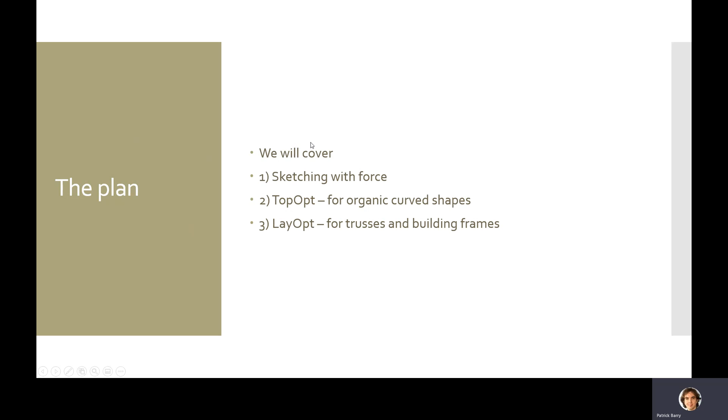What do I mean by sketching with force? Sketching, so 2D, not 3D. Take 30 seconds to make the example, repeat it 5 times, test lots of ideas. The idea is that if something is carrying more force, it gets thicker, which is the same as trees, and the results tend to be quite organic and quite nice looking.

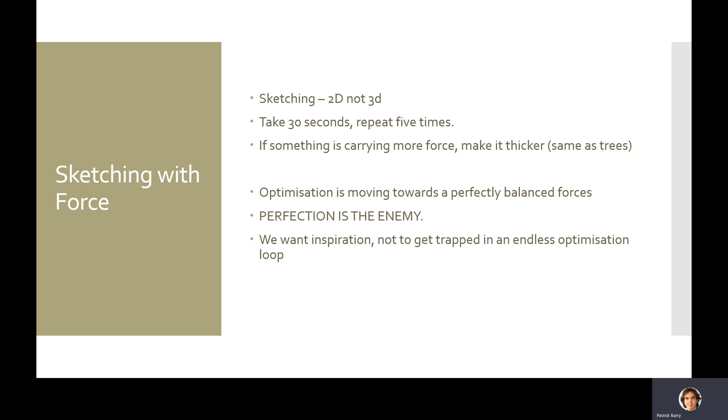Optimization is moving towards perfectly balanced forces, but that's the enemy. We don't want to do that. We don't want to get trapped in this endless loop of moving things 1 millimeter to see if it gives us that 1% improvement. We're looking for inspiration here.

So we'll start with an example. The Qatar National Convention Centre, which has this lovely, sinuous, organic form at the front of it. Taking one half of that front, we're just going to simplify it down to a 2D problem. So we're going to say that there's weight coming in from the roof at those 5 points. We're going to put supports at the bottom,

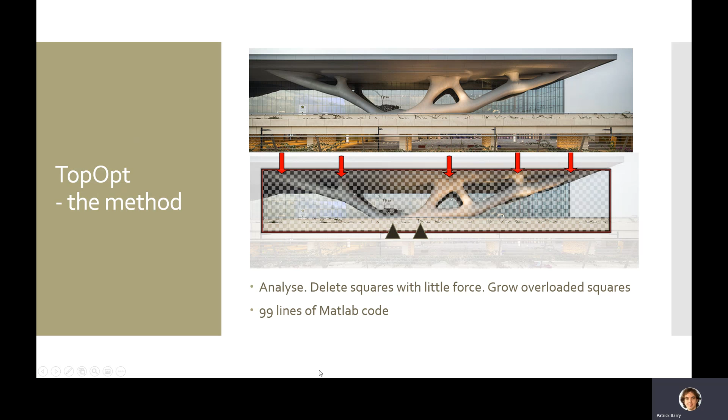and then we're just going to run a mesh across it, analyze it. Where those squares are picking up force, we keep them. If they're not picking up enough force, we delete them. If they're picking up too much force, we put extra back in. This takes 99 lines of MATLAB code. Oh, and that was the first result. This is running it on my phone, so the resolution is quite low.

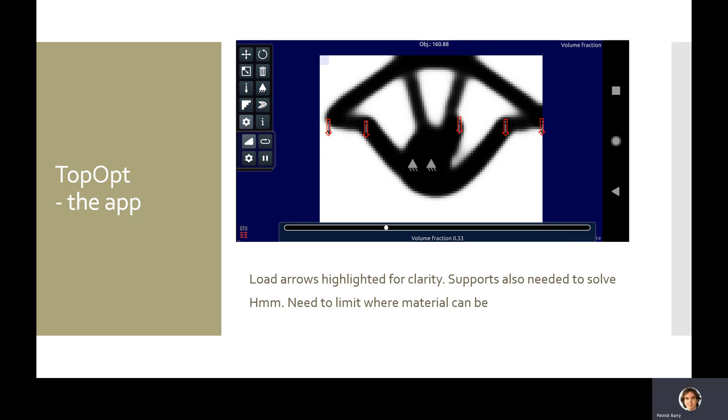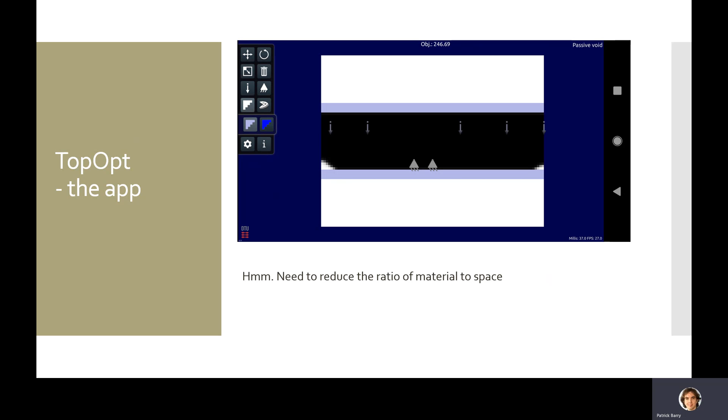But as you can see, I've got the loads in, I've got the supports in, but it's suggesting actually I want this big arch over the top of the center. Now I don't want that. I want to emphasize that low flat shape. So I'm going to put in some constraints, and it solved it almost instantly, but the result is now too solid to actually make out the details. So what I need to do is go to the cog and just dial down the black to white ratio.

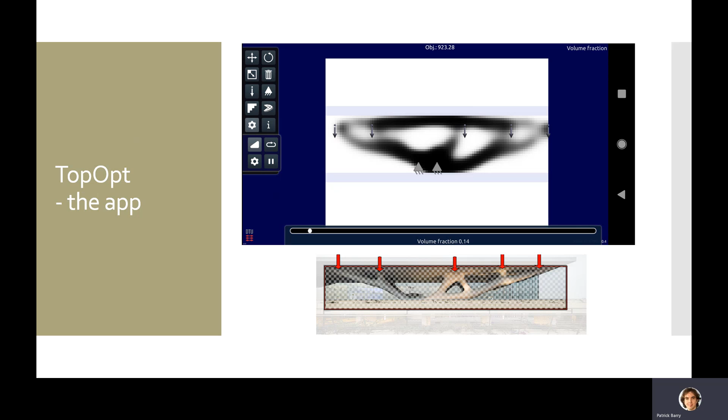And the result is, yeah, fairly close, fairly close. It's missing one extra strut on that central point there. But apart from that, yeah, that would be enough for me to start drawing and sketching out shapes, I think, for the next stage of design. And that's all it needs to do. It's not a perfect shape.

And you can generate those, but they're only valid for that specific design case. If you need to move the roof beam later to accommodate, I don't know, a stairwell or a ventilation hatch, then that arrow where that roof beam is pressing down is moved and a new shape would be made. Very small changes can cause big ripples.

And the other bit is that this is designing to express the forces in the structure. But 99% of the time, the structure is designed for the worst possible combination of things all happening at once. And it might happen once in that structure's life. Is that the thing you want to express? Or are you trying to express the everyday case, but you still need to actually be strong enough to carry that emergency case? So there are limits to this approach, and that's why I'm advocating it as inspiration, not necessarily solution.

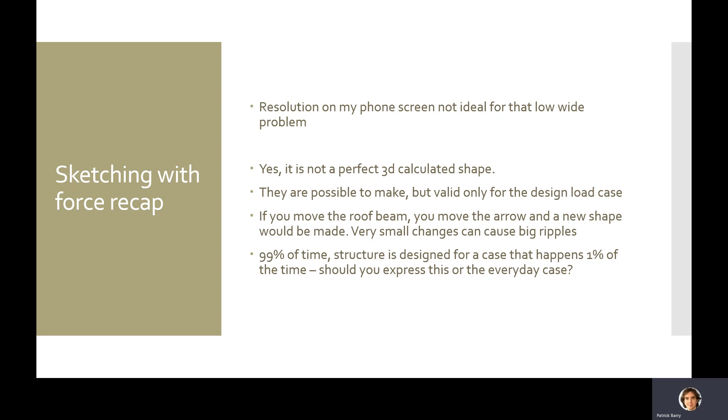A quick example, I was interested in a tree-shaped column. The supports are in the same place, the loads are in the same place. I changed the direction of the loads by about half a degree, and it gave me a completely different solution. So you do have to be very careful. You can't take that this is the one true solution.

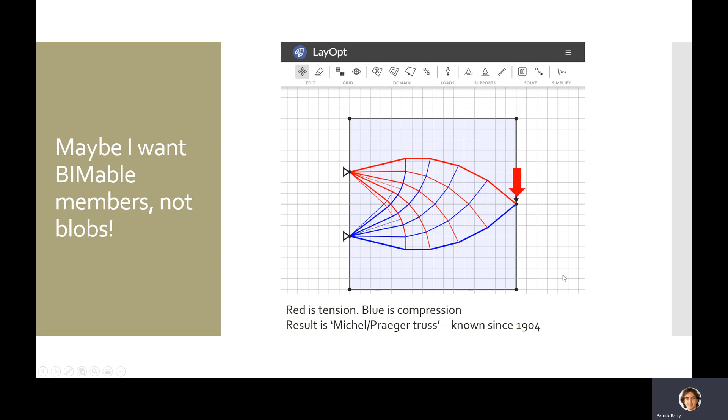The other app I wanted to demonstrate is LayOpt. This isn't an app on the phone. This is a browser-based one, but it works very similarly, and it's very, very intuitive to use. It doesn't work on a grid mesh system. It works by putting nodes throughout the space, connecting all those nodes up to each other, and then getting rid of the elements that aren't doing much. And the result is quite efficient, and it tends to bring the same patterns forward, as you will see.

So for that same Qatar NCC problem, the loads, the supports, none of this is measured. This is all 30-second sketches, but it gives us a completely different solution. And that would give you a very different looking front of building. Not necessarily worse, not necessarily better, but different.

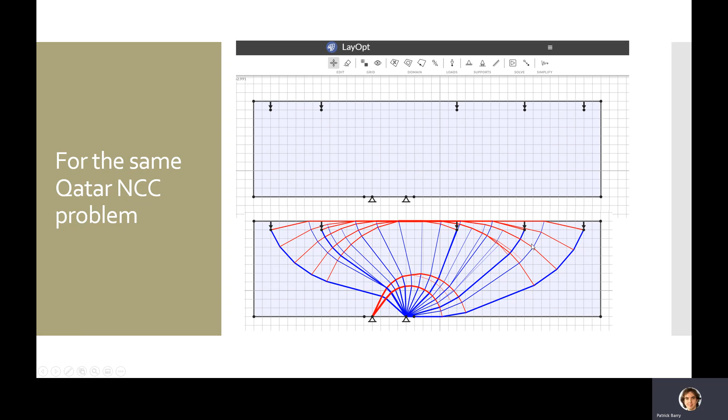We have a nice tension arc across the top, keeping everything tight together. And then these blue lines are the compression arcs carrying those loads up. And we have a second tension arc here to keep this stable because there's slightly more load on this side than on this side.

This was one I generated myself. This is if you've got a reasonably tall building under very heavy wind load, you've got very strong pressure on one side, you've got very strong suction on the other, and you have a twist as that wind pressure changes as it goes over the roof. But the resultant framing is beautiful. I would love to have that on an office building.

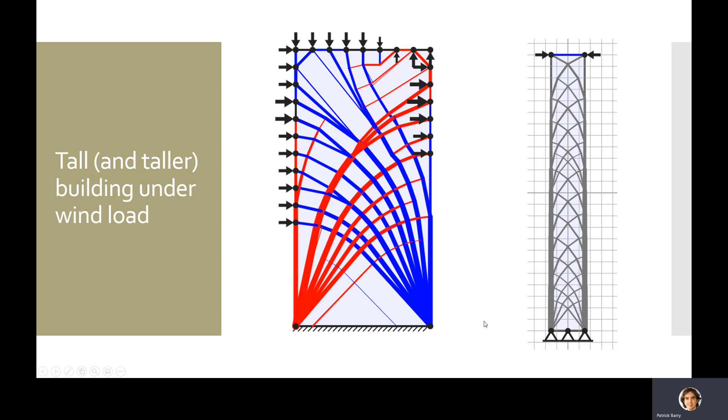If you go taller and thinner and you keep it balanced and symmetrical, then you move away from that classic zigzag or X-frame bracing, and it moves closer to this very sort of Gothic shape. And I would like to see this used. So it's like the other, just inspiring structures.

So above, there is a standard truss, which if rationalized comes in at about half the weight, which is a huge saving in steel and a huge saving on your building if you're saving that weight on every floor.

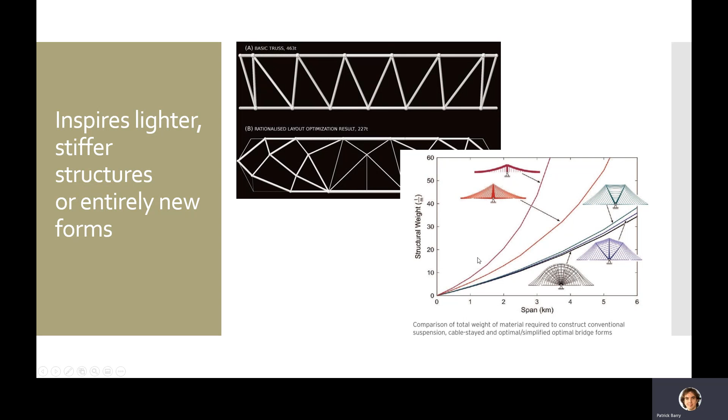The other example here is for a new type of suspension bridge where the pylon is split. So instead of having one big vertical mast, you have multiple ones at angles to allow the forces to flow around the corners, approximating closer to a circle. It might well double the spans we can get on long span bridges.

Speaking of bridges, quick example. Again, this is because it started off as a 2D solver. It's very easy to do a 2D bridge, and it's a very simple example that people can look at and use. It costs the same to manufacture, but you do need to be able to accommodate and manage that complexity. There's more to check, and there's more joints to detail and drawings to pass out. So the automation on this course is going to be partly about managing that.